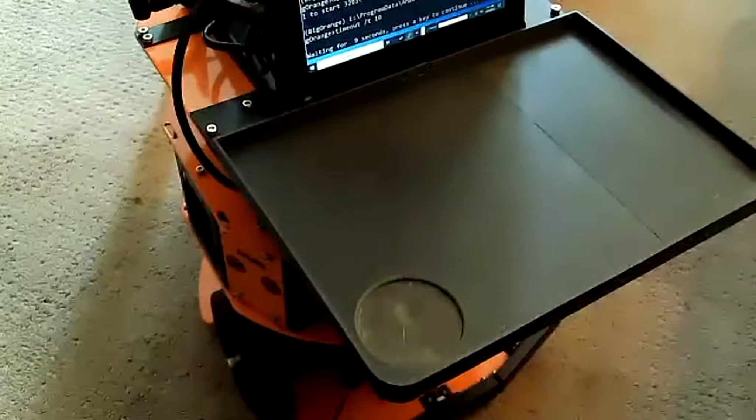Today I wanted to show a little bit of mechanical engineering I did to create a tray for my big orange robot, because I want a cargo tray essentially. Here I'll show you what it looks like. So the robot didn't have much space on it, didn't have any space to carry anything.

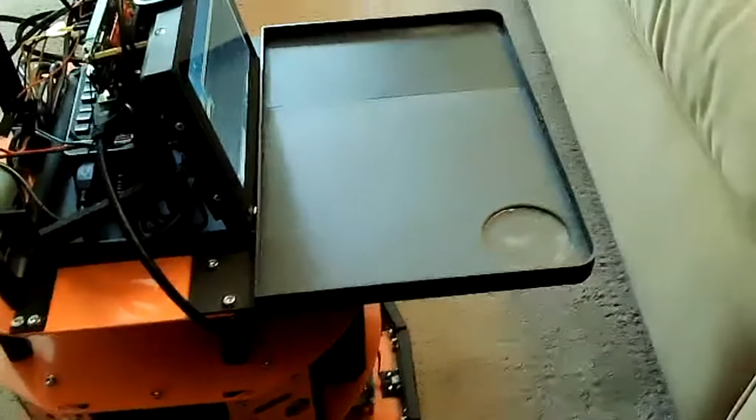Since I'm in this contest, the OpenCV AI contest that Brian Erickson and a few of us are in, the social distancers group, one of our goals is to be able to deliver something from one person to another in the house. So I have a drink holder here, a little depression, it fits a soda can, and it's bolted on.

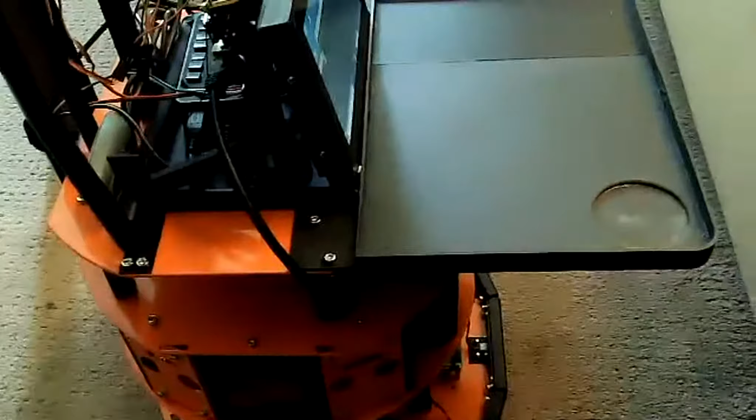The robot actually says, oh sorry, it's starting up: 'Pleased to be at your service.' The robot has cylindrical layers, so what I did was 3D print this and sandwich a layer above and below the arc of the front of the robot, which sticks out about a third of the way. You can see I can push on this, you could put like a 2 or 3 pound weight on it and it'll move the robot before it breaks or anything. I want to show you a bit about how I did that.

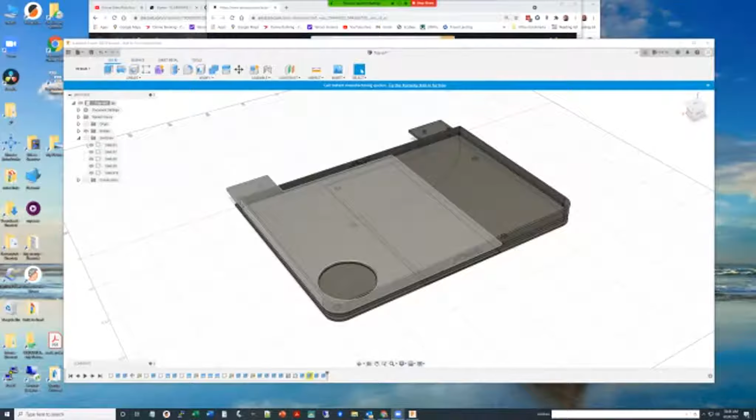In Fusion 360, which I'm still kind of new to, I'm not a real expert. Let's see, can you see this Fusion 360 now? Yes, so this is what it looks like with all the pieces.

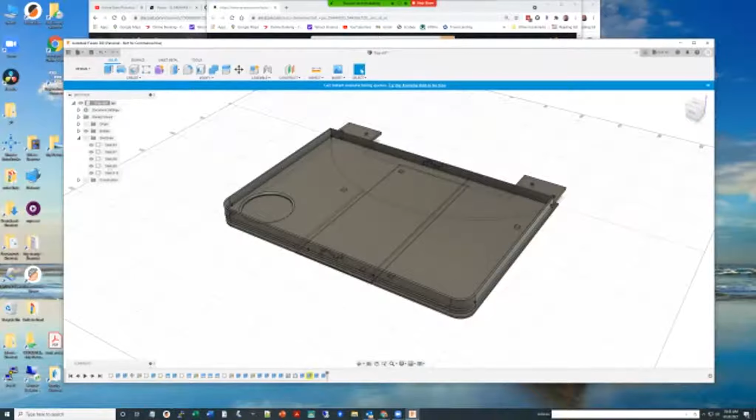Part of the challenge here was I decided I wanted to do something larger than my printer could handle in one piece, so it had to be divided into multiple pieces that could be printed and then glued together. If you hide some of these different bodies here, you can kind of see that each of these is a different piece. That was a later step, obviously, to break it into pieces.

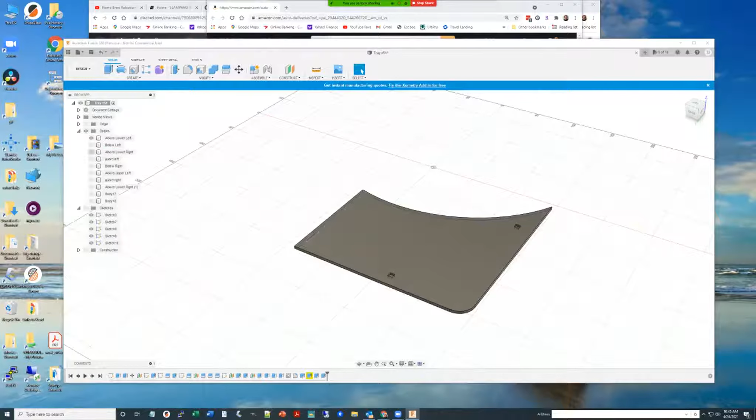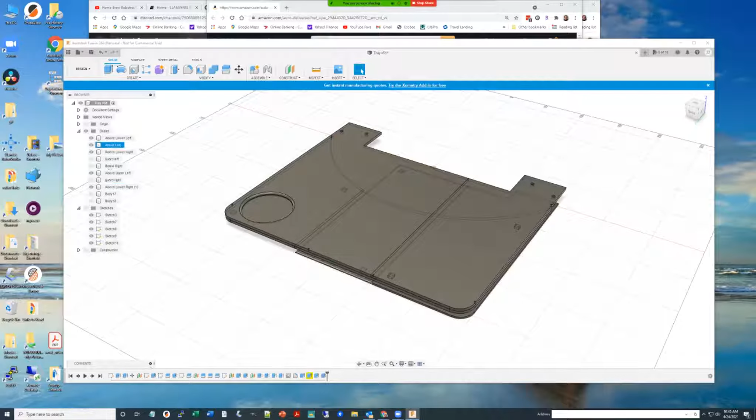So for instance, here's above lower left, above lower right is over there, then above upper left, and then above lower right, and then below - when I say below, that is actually below the top layer of the robot, so that's why these are separated here. It's 3 millimeters. I just broke these out because there are 2 different pieces that are going to get glued together.

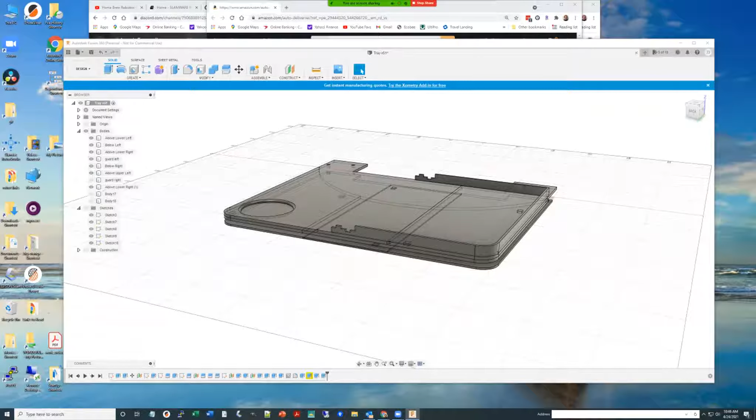And then there's a guard on top. I made a little serrated edge here for gluing. And what's also interesting is to glue these different pieces, I made a large overlapping area on several of them. Like, for instance, below right and below left, they overlap by quite a lot. And that's where the glue goes.

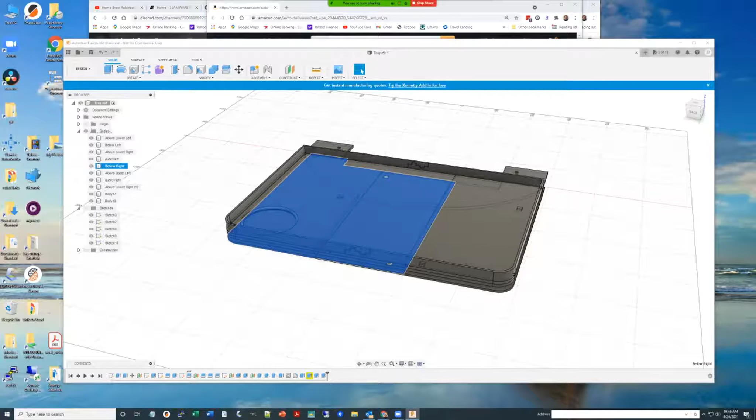So I'll show you a little bit about how I started. It's all with the sketches. So if we go to the first sketch I did, it was this one here.

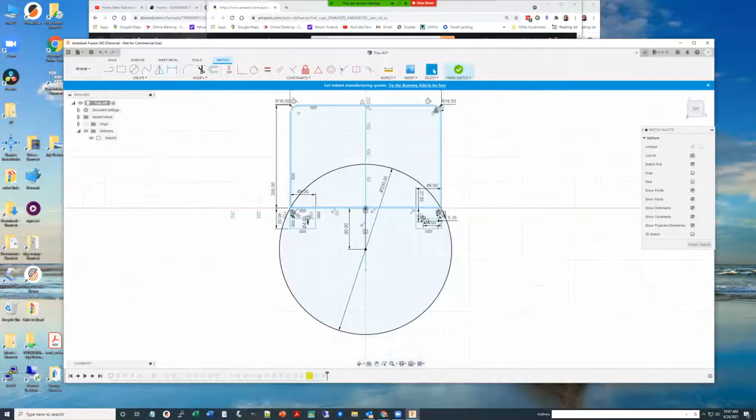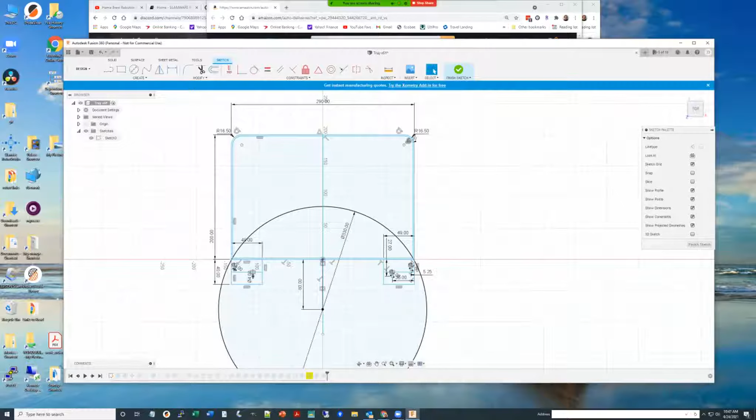And you'll see that it's mainly just circles, lines and circles, and measure and constraints of measurements, and then the screw holes and all that, and then extrusions to create the different pieces. And what's kind of cool is I'll exit this finished sketch.

And there are other sketches that, let's show you, different sketches were done for different things. Like this sketch was simply a way to cut. Some of these were to cut the object into different pieces. Like these are different cuts through the lengthwise dimension. And let me exit that.

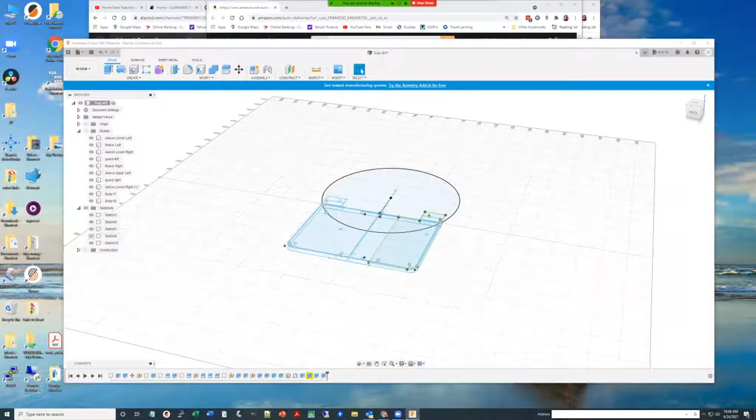Oops. Oh, I turned off sketches. So that's how that works. I mean, there's a lot of detail to it, but you can create different sketches and then do different extrusions from those sketches, and you end up with the bodies. And then I broke up the bodies into different pieces for printing, and then printed them all and glued them all. So it's kind of a neat process.

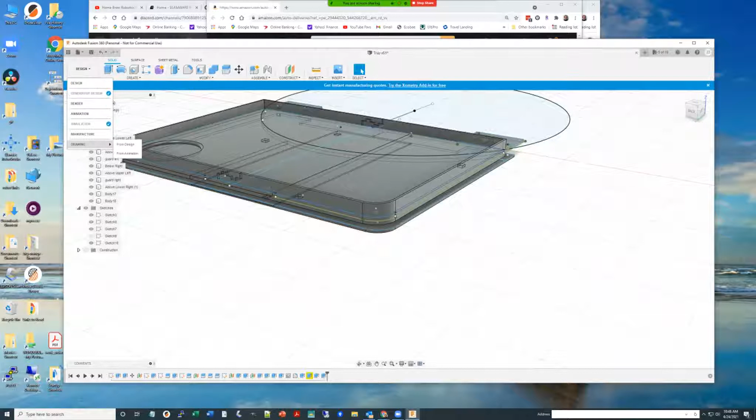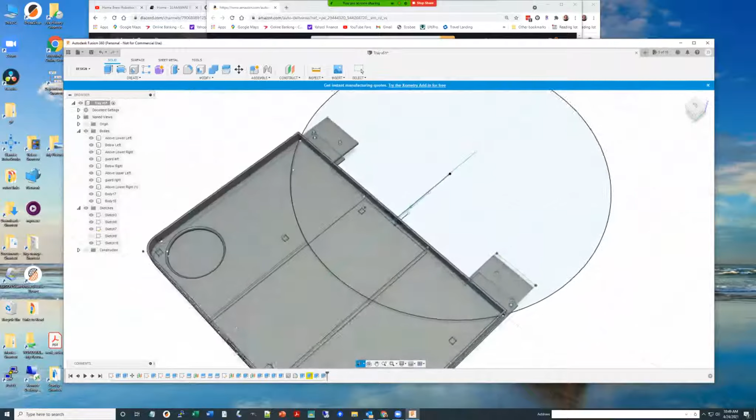And one thing that's sort of different is I went into the drawing in order to make sure things would fit. I printed a piece of paper with the outline of these objects, at least with the upper and lower level, to see that the screw holes lined up and that things fit properly.

So that was in the drawing area, where you can go into the drawing mode, and let's see if it's going to come up here. There it is. So I printed a piece of paper with this on it so that I could actually go and see if it worked, kind of fit properly before I 3D printed.

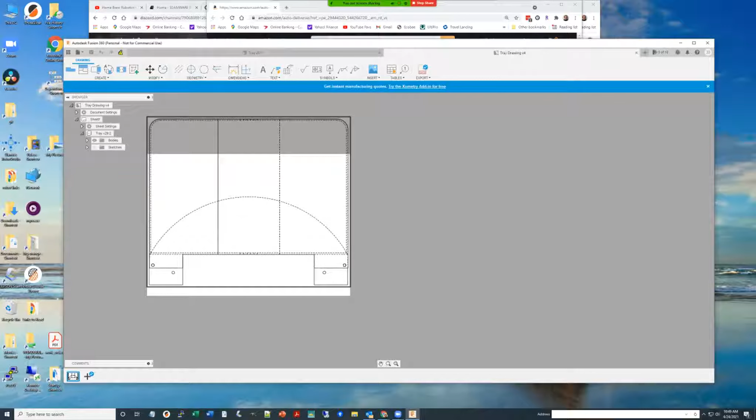And I made some adjustments, because something was slightly off. So that really helped prevent wasted time. Yeah, so that's that part. Anybody have any questions about this?

Yeah, I got one. I'm curious how many hours of work, let's say, on the design you think you have in that.

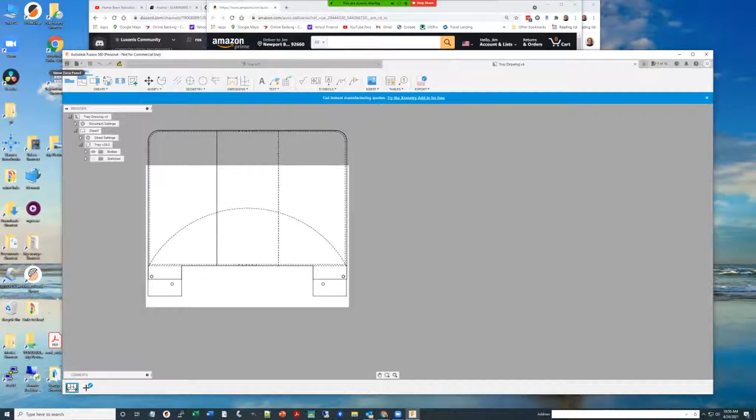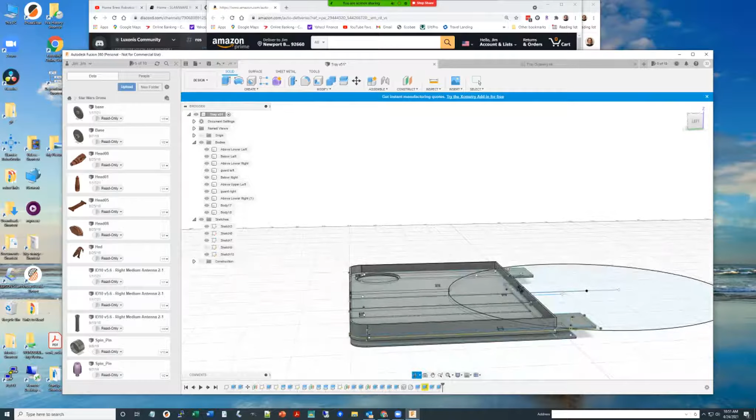Yeah, I mean, it wasn't too bad, even though it's probably a little longer for me because I'm not that proficient with this software, but it took several hours to do that. I mean, a few hours, multiple sessions I'll say, and then making some mistakes and backtracking, but nothing huge. Most of this was not too difficult as far as advanced features. It's using kind of fairly basic features of the software. The solid extrusions and fillets, I guess, and drilling holes. It's not too complicated. A lot of the longer part was kind of dividing it up to get it to print properly. That takes time.

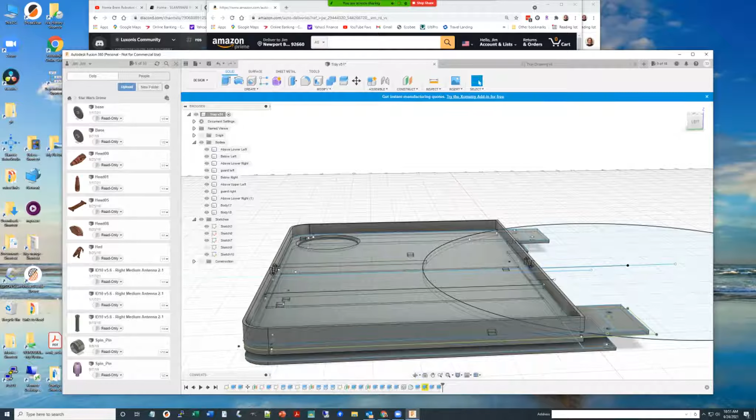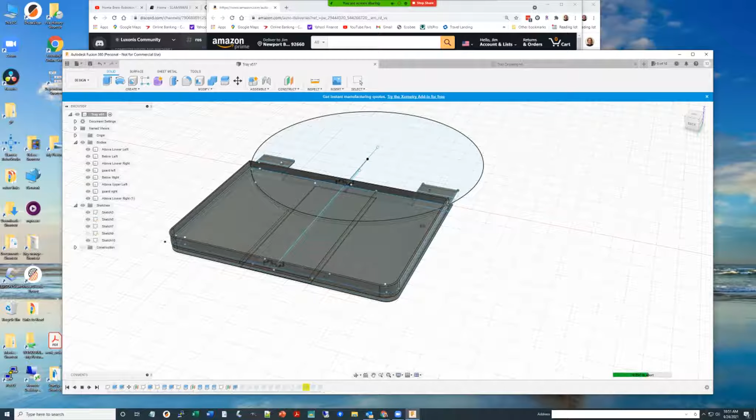And oh, I wanted to show you, well, one of the best features of the software is the parametric history, and so you can rewind it and then play it forward and see as things developed. I guess it doesn't show. Yeah, there it goes.

But you're saying it kind of has infinite undos back to the beginning. It keeps everything, yeah, well, parametric. What's really cool about this is you do an operation, and you can even change the order of these, but that operation can be depended on by future operations. And so if you want to change a dimension, you can go back to, for instance, an early sketch and then change the dimension, and it will propagate all the way through to the end, unless there's some sort of conflict or something, but that's what's kind of cool about it.

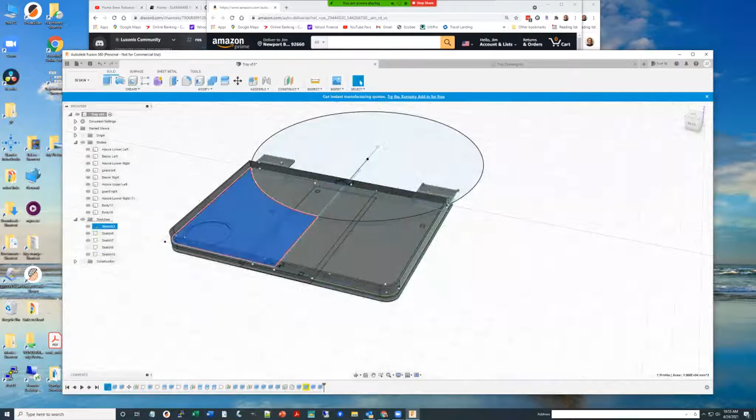So you can essentially rewind, edit something earlier, and then close it out, and then it will apply that. So for instance, I'd go back to something like this. My hole, I could make this hole deeper and wider, and then hit OK. And now it goes forward to the end, and everything that depended on it would be applied.

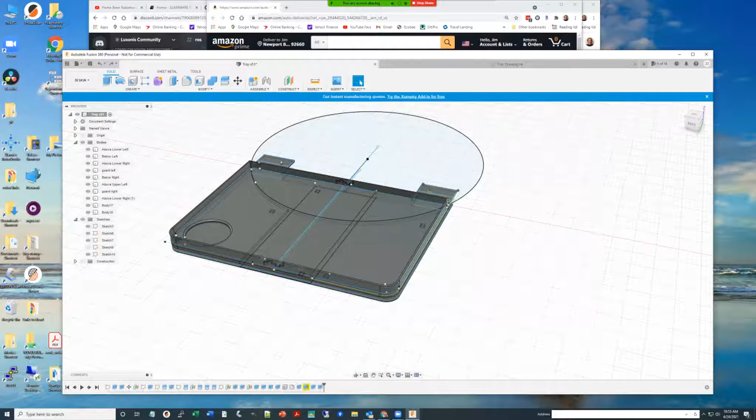Have you considered doing a workshop on Autodesk Fusion? You're really great at this. This is pretty cool. No, thank you.

I defer to others, people like Alan have given multiple demonstrations and workshops, but I eventually, as a beginner, maybe I have a different kind of insight into it, or into how a beginner thinks.

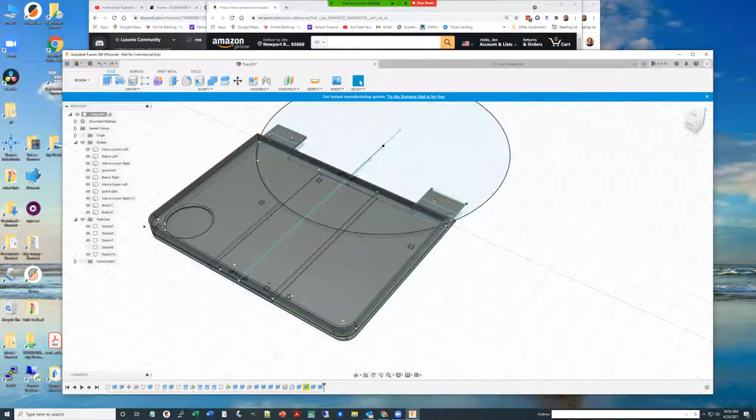Jim, but this is Buzz. Nice job. Very intriguing design, and I think you've done a marvelous job on this. I have two questions.

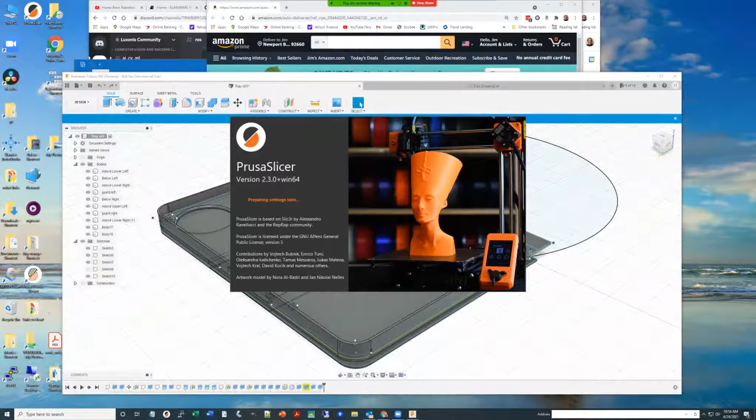One is, in the actual 3D printing of the material, it's my understanding, after listening to everybody talking about 3D printing, that there could be some tolerance problems after each piece is printed relative to the edges and size of things to be able to fit together. If you could comment on that, I'd appreciate it.

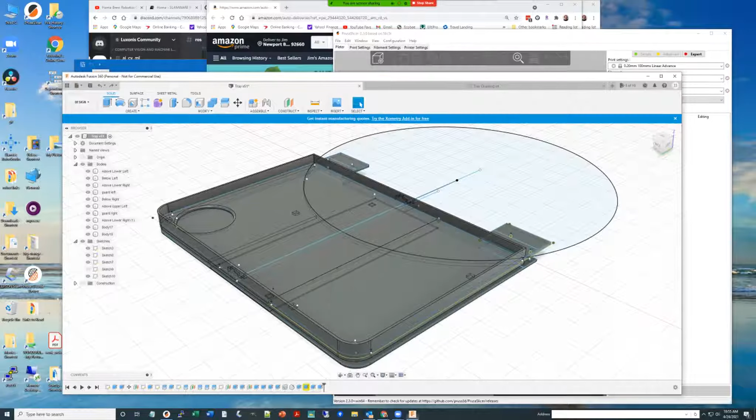But even more importantly, the second question is, do you have like a guide wheel underneath the robot that would help support the body from a center of gravity standpoint when you actually put things on the tray? As you demonstrated earlier, as you push on the tray, the robot tends to tilt forward. So how do you deal with keeping things stable as you put a load on the tray, in terms of supporting that from the center of gravity standpoint? It would seem like a guide wheel in the front might help.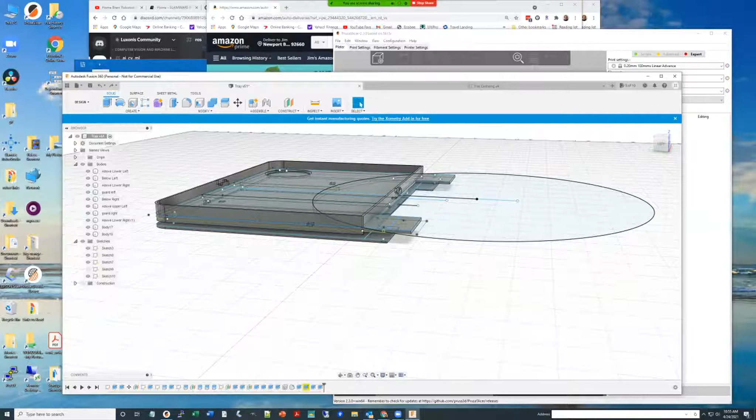Yeah, that's a good question. I haven't really done a lot with that, other than I've tested it with a 3-pound weight, and it doesn't tilt too badly. I was thinking of doing a balance, or if there's a weight issue, I'd add a kind of center of gravity adjustment. But I guess you could also have a counterweight in the back, some sort of little lead weight that you hang off the back, that would help compensate if necessary.

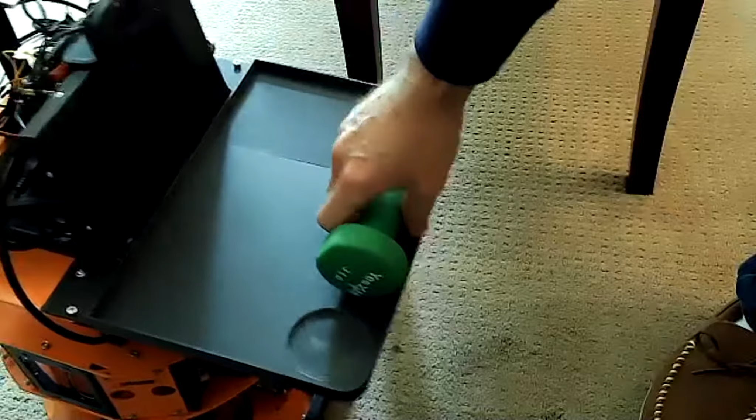Yeah, see, this is 3 pounds, even at the edge, that's not good. But if I put the 3 pounds in the middle, it doesn't deflect. Can you see that? This isn't meant to carry heavy loads, it's meant to carry some small household items, like a drink, some medicine, a book maybe. But if 3 pounds is too much, I don't know how much more I'd go, but your idea of a wheel, some sort of thing in the front, may be a good idea, like a caster.

Yeah, that's what I was thinking of, like a caster wheel underneath, toward the edge of the underside of the robot, so that it would stabilize the thing and wouldn't rock back and forth as much. Yeah, that sounds like a good idea, and I appreciate any input about that. The battery is toward the back, so it was kind of back heavy anyway, but looks like, yes, I forgot to set my timer.

That's 15 minutes, but you are into questions, so.

This is Jim Ubersetsig. I have a simple question. What sort or what type of glue did you use to assemble these various parts of the tray together?

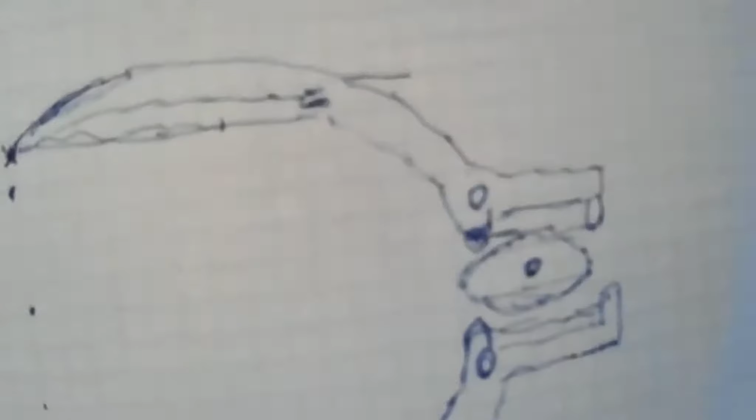So here's a picture of what I designed for a compliant claw for the gripper. I don't know if y'all can see that. If you back off just a little bit, we'll see the whole image. I'm not mechanically inclined, so that's basically what I drew.

Now I implemented that in SCAD. Let me see if I can share this screen. Share screen, and I think it'll let me choose which screen here. Share. Okay, you guys seeing this now?

Yep, all right, so this is the spring element for the gripper's compliance, and it's just a 1 millimeter bar as part of the gripper. The curve is made by differencing two circles, and this part is just a cube and a little cube here. Now the reason for this lever, instead of having it attached, is when you bend a leaf spring, it has to move one way or the other. On your car, it's hung off of a couple of hinges.

In this case, I've just got it fixed out here and then sprung back here, and it'll give it some compliance. Then this will be the pivot hole, and I've got a long hole through here that I plan to put a piece of piano wire in to work against the cam that's going to drive the gripper open and closed.

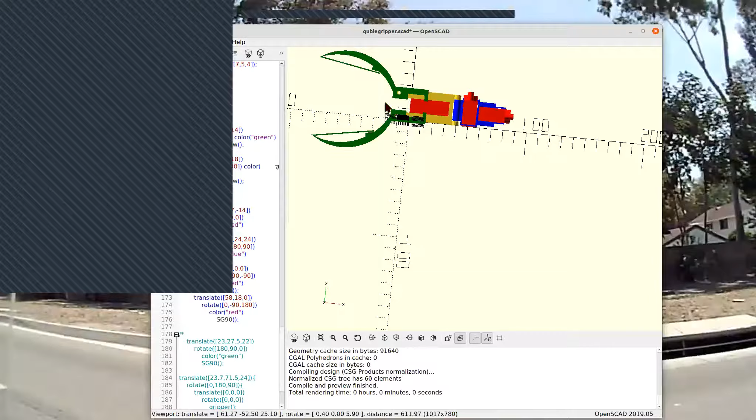The red parts are the servos, and this servo will rotate it on the wrist part where it's connected to the arm. This servo controls the hinge. Now if I roll this up a little bit, I'm not real good with this stuff, but anyway, there you can kind of see this is the hinge.

The arm on the servo will come down here, and I will use a connecting link between here and here, and that will allow it to fold this piece so that the wrist can then be compliant up to 90 degrees in one direction and probably about 60 degrees in the other, which is kind of similar to what we have with our hands.

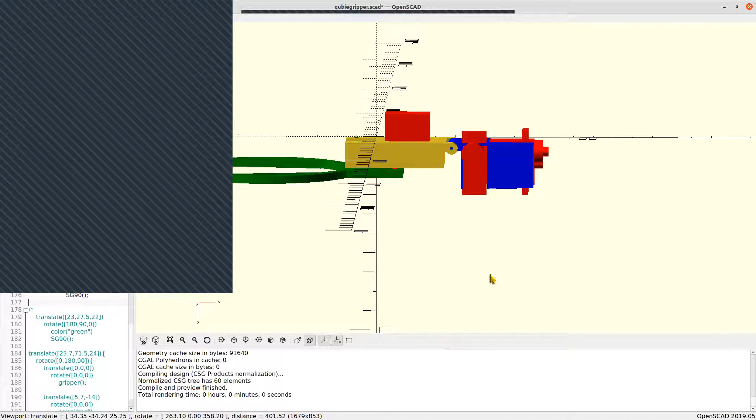And then the gripper itself is going to be cam driven. I don't have the proportions quite right on the bar driving portion of it, but you can see this part here needs to come back a little further yet. So the way I'm going to do that is I'm going to move the pivot points back. Right now they're lined up for the mechanics of the gripper, and you can see the holes clear through where I plan to put the screws.

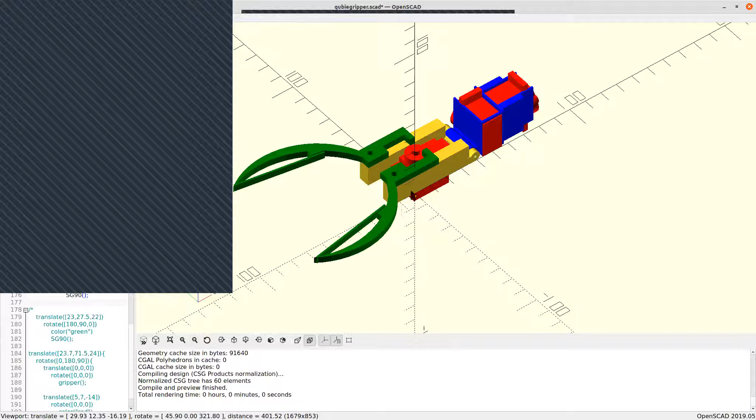And then the actual printout of the compliant gripper is like this.

If I can learn to aim this camera, you can kind of see it there. To show you how it grips, if I push on that, you can see the spring has quite a bit of give to it. And the depth of it I limited because plastic will conform to a degree, but it eventually loses some of its elasticity, and you don't want it to break easily. So you limit how far it can deflect. You can see here, just from me playing with them, these have already deformed a little bit.

They're not parallel with each other any longer. So when they're put together, they'll be like this. My plan is to have them about that open, which is roughly about 3 to 4 inches. Then the back part here is going to have a piece of piano wire in it that runs on a cam.

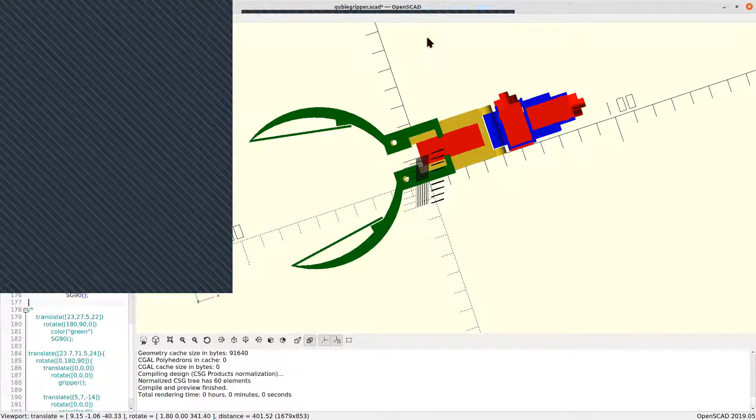Let me figure out how to share the screen again. Okay, what do I do here? You're still sharing. Yeah. Me and Zoom are not going to get along with this, I see. That's not what I want. I want the other one. Okay. Ah, here we go. Stupid eyes. Okay, there we go. I've turned off the sharing.

The idea is that the servos can drive the gripper and use a cam which will allow me to control the distance of rotation. So I no longer have the problem with driving the servo to its limit and burning it up or drawing too much current from it. I think I'm getting pretty close, but me and my friend are having a little discussion with each other on sticking down to the bed again. But that's where I'm at.

Les, you get extra points for the OpenSCAD. I'm sorry? You get extra points for OpenSCAD.

Well, I love OpenSCAD. I'm not a good artist, as you can tell from my drawings down here. So having something I can program to get a physical object is pretty nice. That's why I love it. Any questions?

Where is that? Is that going to go on your main robot? Yes. Okay, at the end effector? It's the end effectors for the arms. Jim, you got to collaborate with Les in order to get your arm for your robot. That'll grip your soda.

Yeah, actually this could be a pretty good system. What I was thinking about is if you made a stack of 3 of these grippers, and spaced them out a little bit, you'd have something that would be compliant to an odd shape as well. So like with picking up a ball or a spool or something like that.

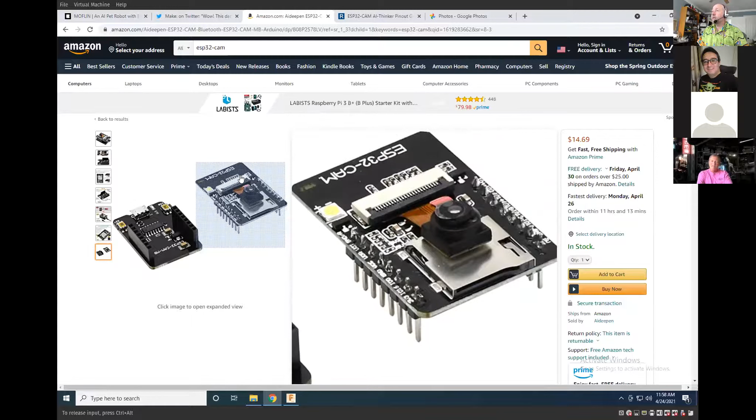Then Sergey made that post on Google Groups about the ESP32 Cam, and so this is why I blame him. Everything clicked. It's a dual core 240 megahertz processor, a bunch of IO, 3.3 volt tolerant. This particular version of the board has a camera interface, and there are vision, web, and face detection libraries that come from the ESP32 developer for free. So all this came together into this Frankenstein project to build something super small and cute that I'm calling Kawaii.

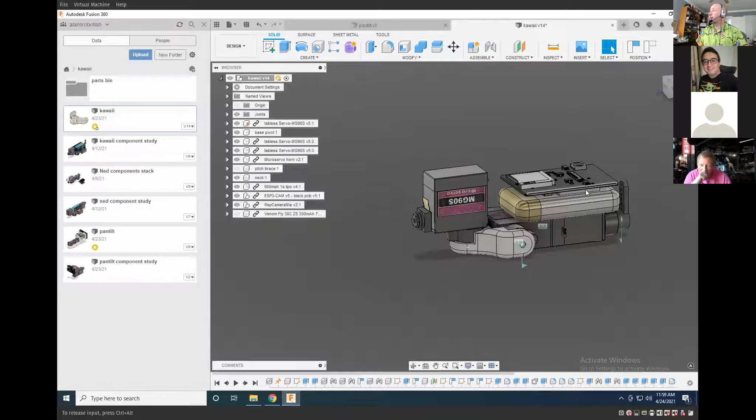When it's actually built, the first version should be about 90 millimeters butt to nose. It'll have a camera, it should be able to face track, and it's got a little tail that wags.

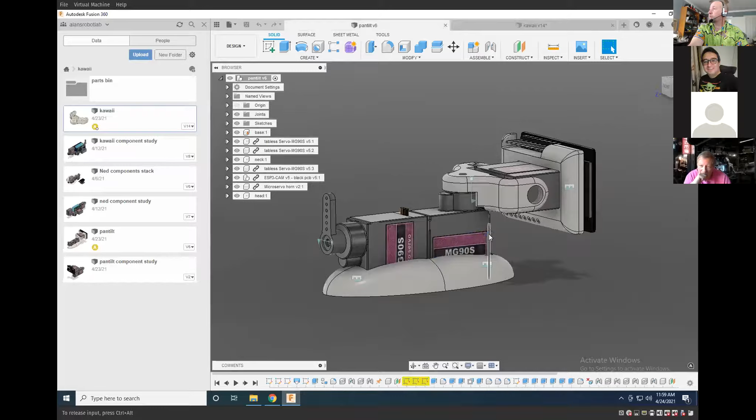I decided to finally take my own advice. I had mentioned to a friend that it's better to iterate often than to spend your entire life designing something and not getting it to paper or in your hands. So last night I rearranged some stuff with the components I had to get something ready to play with, so I could learn more about the pan tilt and the free RTOS servo control.

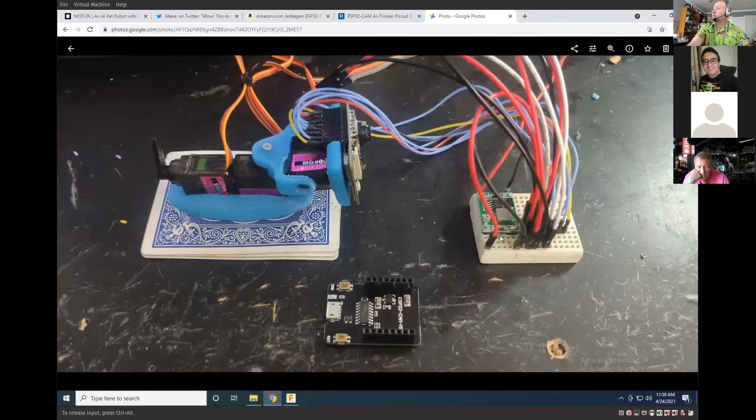So this is the guy I've got on my desk right now as kind of a demonstrator. He's got the deadly Frankenstein wire situation. I was curious about if I could run the servos and the board off of 3.3 volts, and it turns out I can't. So I've got a 4.5 volt buck down converter. Let's see if this will run.

So I've got my version of the Hello World example right now, where I have free RTOS, the multi-threaded library. I've got a thread to wag the tail and a thread to move the head, and they're going through some motions just to familiarize myself with the framework. This is being done in Visual Studio Code, but not Arduino—it's actually using the libraries and build system from Espressif, the people that create the designs for the ESP32 boards.

I'm hoping over the next couple of weeks that I'll be able to integrate the face detection with the servos to do some face tracking and fun stuff, making the tail wag faster or slower based on if it sees someone or not. Then this is supposed to go into something soft and fluffy and terribly small for like a pocket pet. So this is the rabbit hole I've fallen down most recently.

Very nice, that is so delightful, Alan. That's pretty cool.

So yeah, I'm hoping to learn how to apply the fur. It's supposed to be a pocket pet with a little IMU that when you put it in your pocket, it'll look down and still be able to identify faces. There's all kinds of fun stuff I'm doing with the vision library.

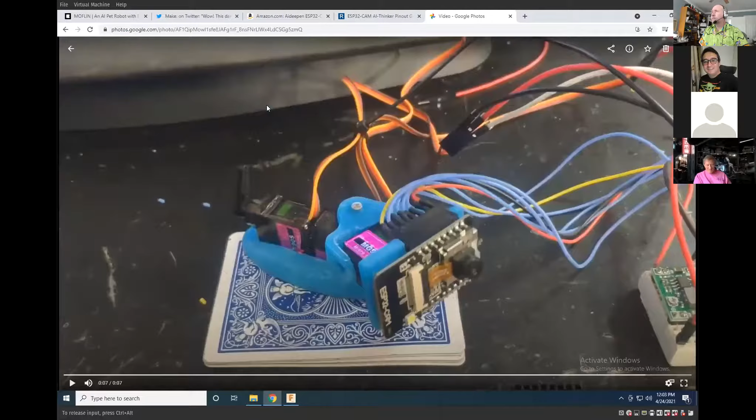Let's grab the back side of it. So Espressif makes these modules. They're all-in-one modules, and they have all the requisite approvals for Bluetooth and Wi-Fi. So what's nice about them is that if you want Bluetooth, Wi-Fi, and processing, you can just buy their module, which is already approved, stick it in your board, and you're good to go.

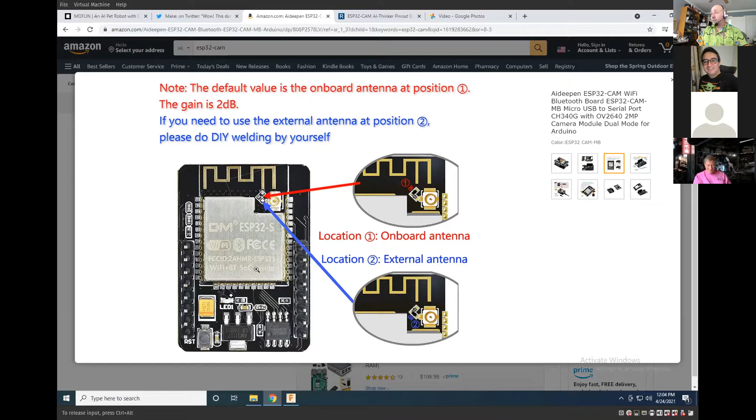A lot of these boards support them. The name of the underlying company is Espressif, and they've got a GitHub. They've done a whole bunch of highly optimized libraries for face detection and face recognition, and they even have versions of the library available for Arduino if you want to code it Arduino style.

But this is the project where I've moved over to the Espressif IDE. There's a few more steps, and some of the steps are different, but it gives me a lot finer control over how the resources of the board are allocated and used. Right, so this is it.

It's interesting how in our project that we're working on with the OpenCV AI kit, they have their own stack with that camera, the Oak D - it has its own stack of facial detection and running models and all that. And also OpenCV you can use. Of course, you could probably use OpenCV as well. That's available to you as a library, right?

Yeah, typically OpenCV is used in a Linux environment. I think I've seen a couple of ports to microcontrollers, and the face detection algorithm that Espressif published is actually a 3-step process. Step 1 is very OpenCV-like, in that it's looking for facial features - corners of eyes, corners of noses - and then based on finding those features, it'll draw a box based on that scale, and then do a second layer of detection based on a simplified neural net to verify if that's a face or not. So it's actually pretty fast for the processor that it is, and it's pretty cool.